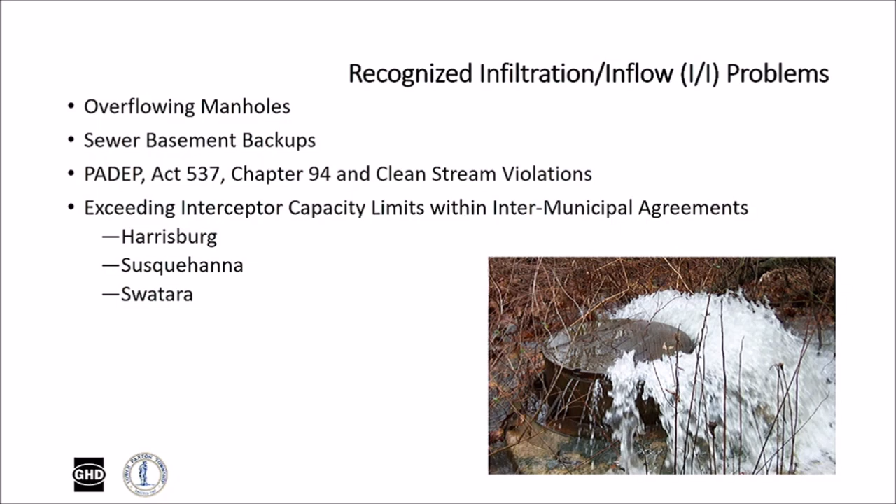A little bit about why we're here: we have overflowing manholes and sewer basement backups that have been eliminated. This all started back in 1993, which required us to address a violation of our Clean Streams Law under Chapter 94. We also exceeded interceptor capacities under our local intermunicipal agreements, including with Harrisburg, Susquehanna, and Swatara. All this led to a consent decree with DEP.

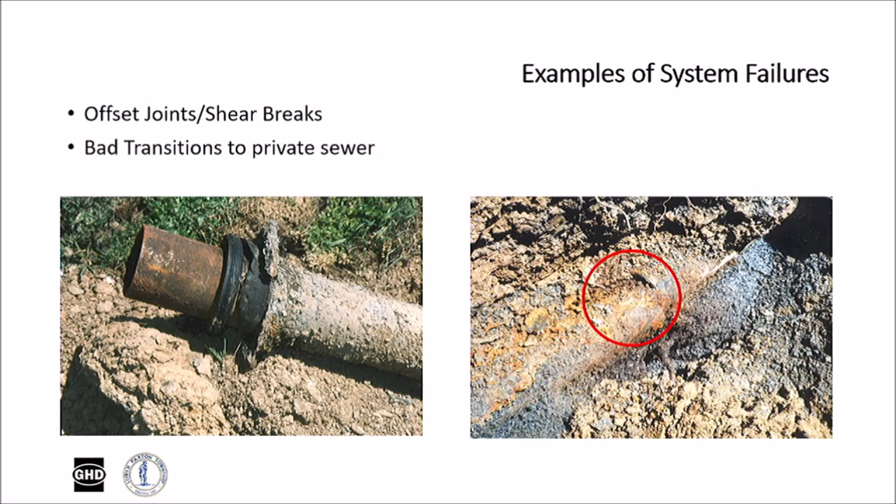Again, a little bit about why we're here. You can see from these photos what happens with a 50-plus-year-old sewer system. There are failures in the pipe when it's not backfilled properly, and to the left you can see where the joints were not well established when constructed—bad transitions and missing pieces. Here's another example of poor backfilling procedures from back in the 70s, with missing pieces of pipe.

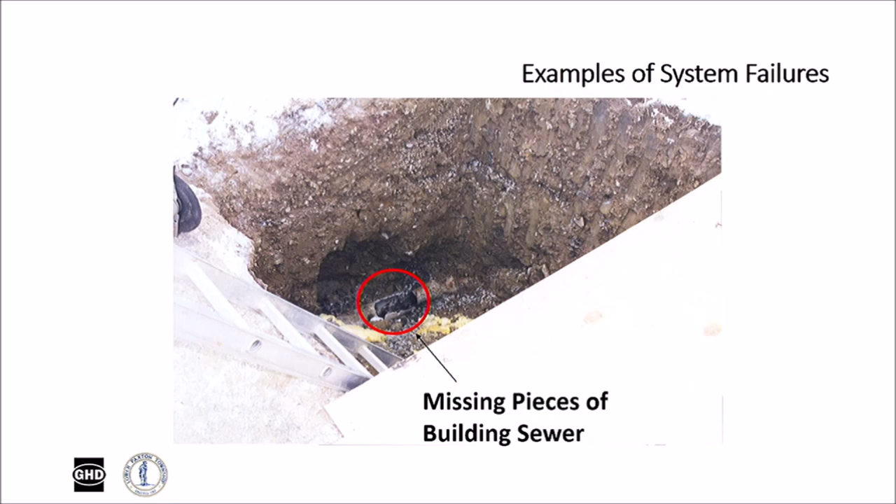All this led to the Second Amendment to the Second Consent Decree. Our engineer recommended that the 50-year-old sewers, made of asbestos cement and clay, have reached their useful life and need to be replaced.

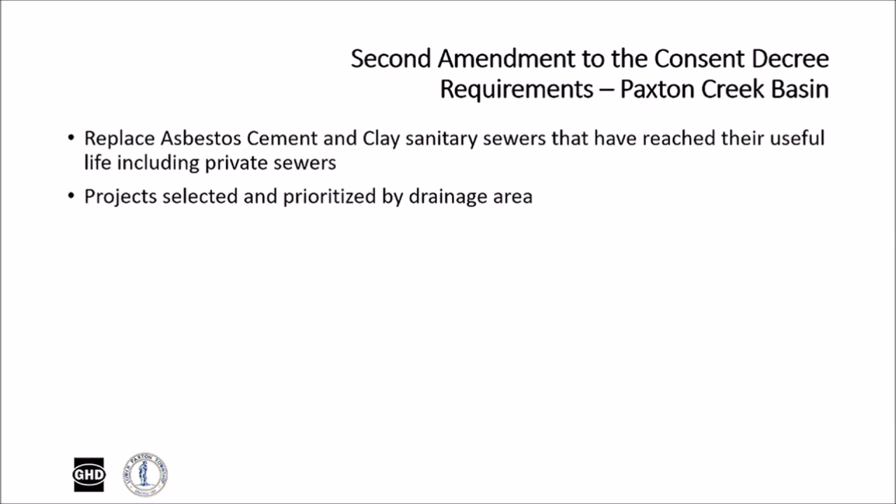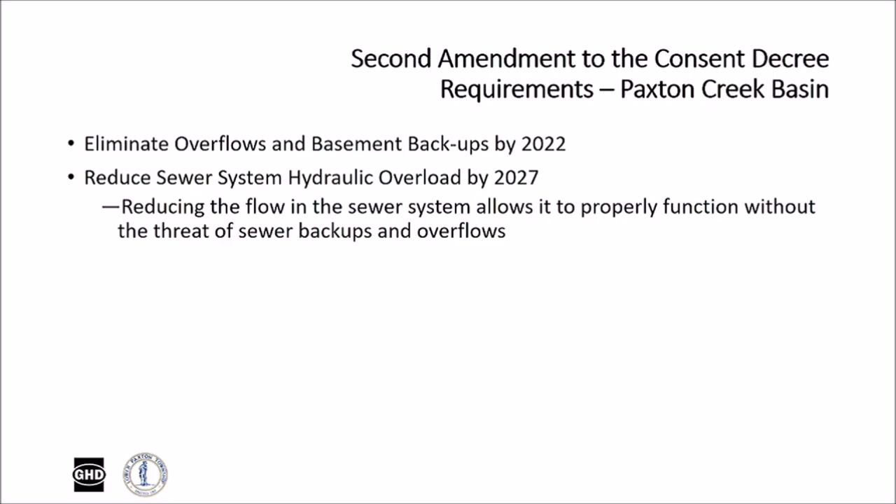The projects are selected and prioritized by drainage basin and by sewer flow metering. The goal is to eliminate all overflows and basement backups by 2022. We are down to one overflow, having eliminated over 100 basement backups and overflows with these projects over the last 30 years. By 2027, we aim to reduce flow in the whole system so it functions properly without the threat of a sewer backup or overflow.

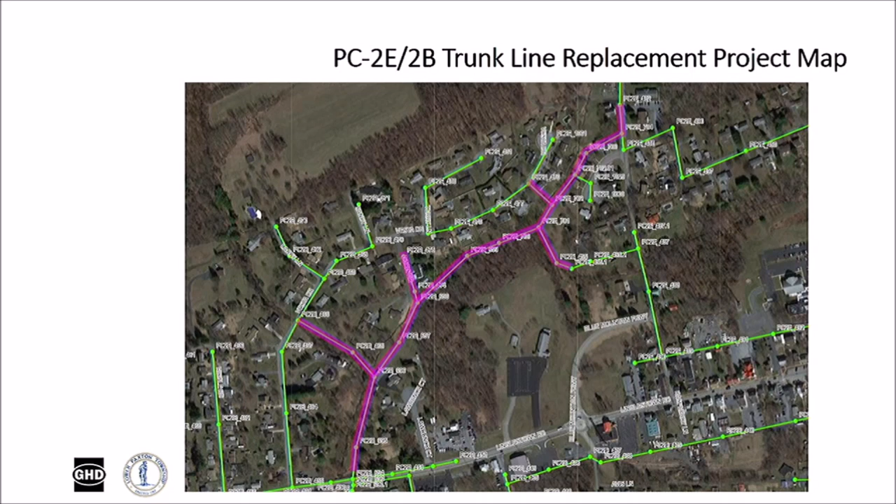This is a map of the project area. You all live here and are familiar with it. The pink line starts on Linglestown Road and travels north, with offshoots up into the side streets. This project is anticipated to eliminate an overflow that was reported by residents in your area. We'll go through it piece by piece on the sewer system up there.

The project will consist of replacing old pipe—3,800 feet of asbestos cement sewer. There are 20 laterals that will be replaced; we're not going all the way to the house, but will replace that portion of the private sewer within the sewer easement. There are also portions of the stormwater conveyance system that will be replaced, now that the Authority owns stormwater, along with other miscellaneous work needed as part of this project.

The first part is right-of-way clearing and so forth. The estimate is $2 million, and that will be updated next month when we complete the design. The design is about 90% complete right now.

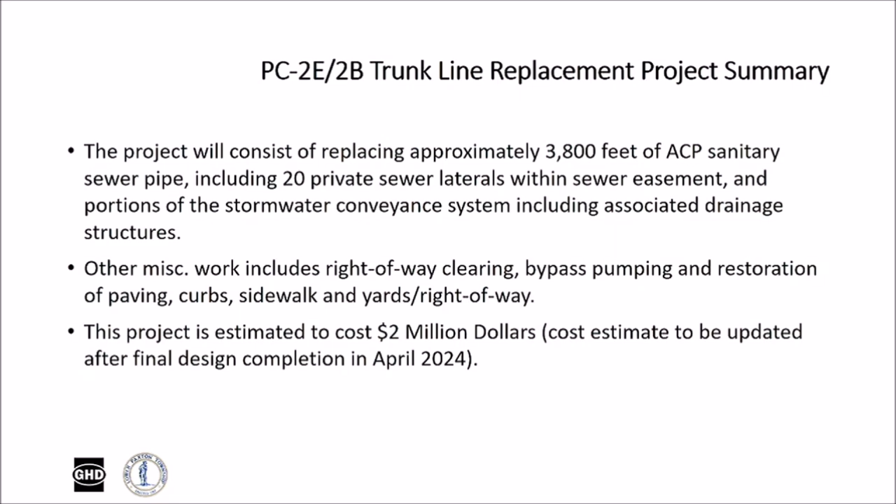A little bit about the design: again, this starts on Linglestown Road. The engineer is required to stay away from the stream and move the sewer away from it where possible, also to minimize stream crossings.

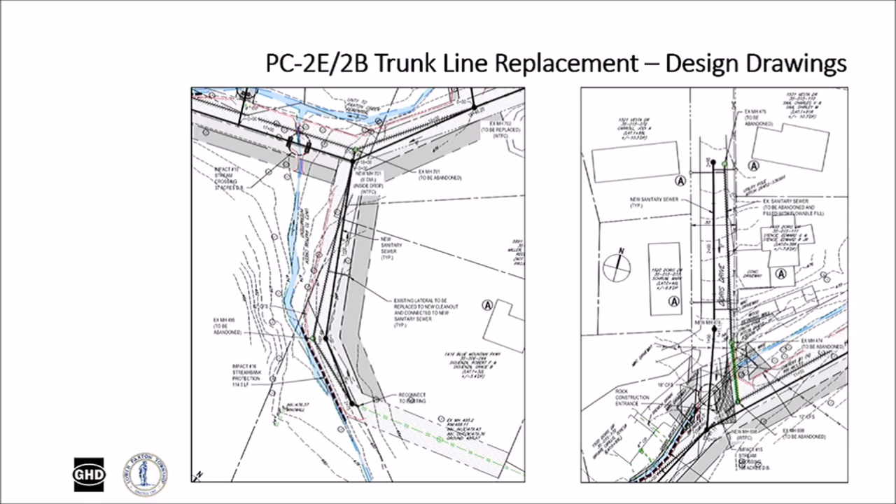A little bit more about the design. As I mentioned, the DEP criteria for sewer and storm replacements requires engineers to minimize impacts to streams and wetlands. The authority will be required to acquire new easements from owners who already have an existing easement, but in order to relocate the sewer to minimize these impacts, there's just a small portion of new easement needed along with the existing.

All the off-street sewers are owned by the authority for sewer, but for storm sewer, those are still considered private.

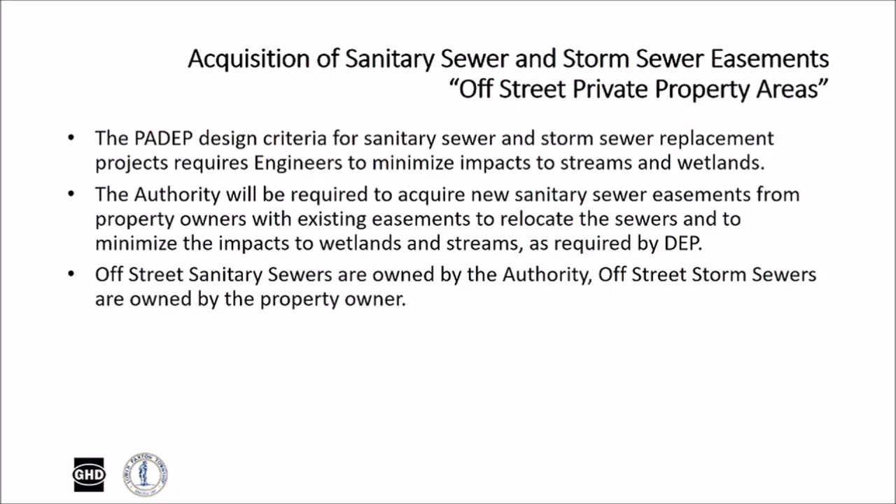Upon request, staff and the engineer will meet with each owner to discuss the easements and address any concerns or impacts the easement may have on your property. We encourage you to do that, and we'll talk about that more as we go. Following construction, all your easement areas will be restored to their original condition.

We're going to talk a lot about the obstructions. There's quite a few obstructions in this project. A lot of the backyards are small, and there's sheds and fences in the way, and very limited work zones in some areas, along with the creek. In most cases, the sheds can be relocated and the fence is temporarily removed and replaced, so we're going to go over that next.

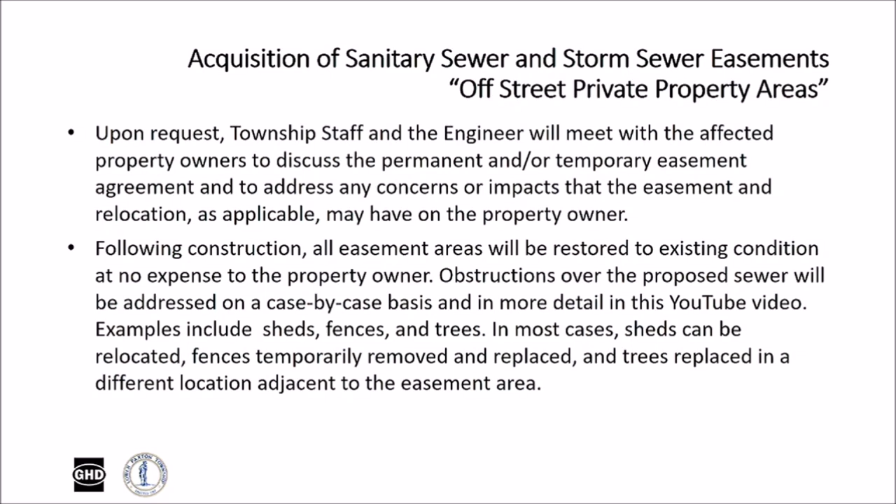So these are just the type of easements. Generally speaking, there's 22. They're all sewer or stormwater, and these are just different variations. You have some that are permanent sewer, temporary sewer, some with sewer and storm sewer. It'll be detailed in your letter which type you've received, and we're going to show some examples of that.

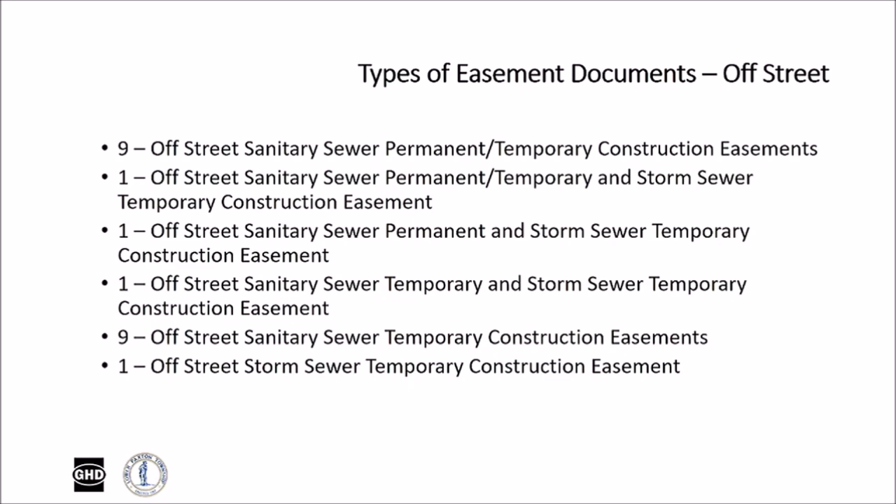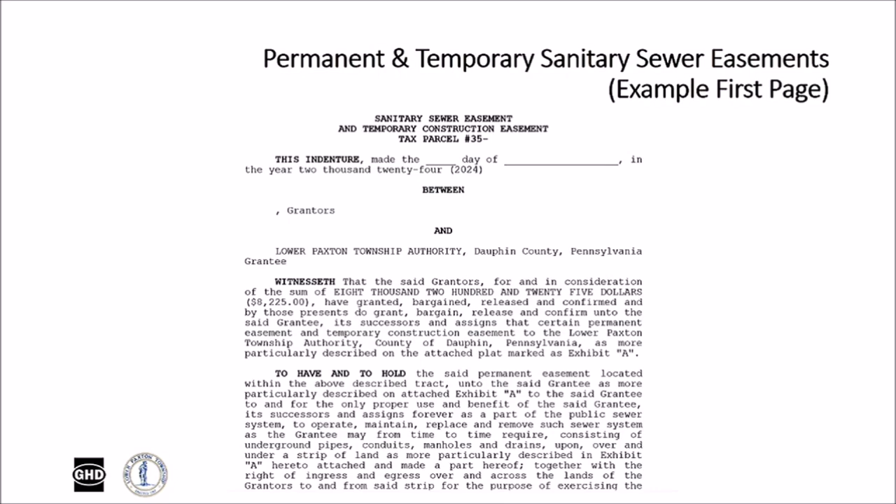This is just a standard easement agreement document that all solicitors use for municipalities and authorities. This is just the first page, but basically all it does is show that you're granting the authority a sewer easement. For the permanent ones, it has to be recorded at the courthouse. For temporary, it extinguishes after the project is over.

This is an example of a permanent easement. You can see the sewer being relocated, and then there's that small area along the creek where we need existing plus new sewer easement. The temporary easement allows sufficient area for the contractor to store materials and do the construction.

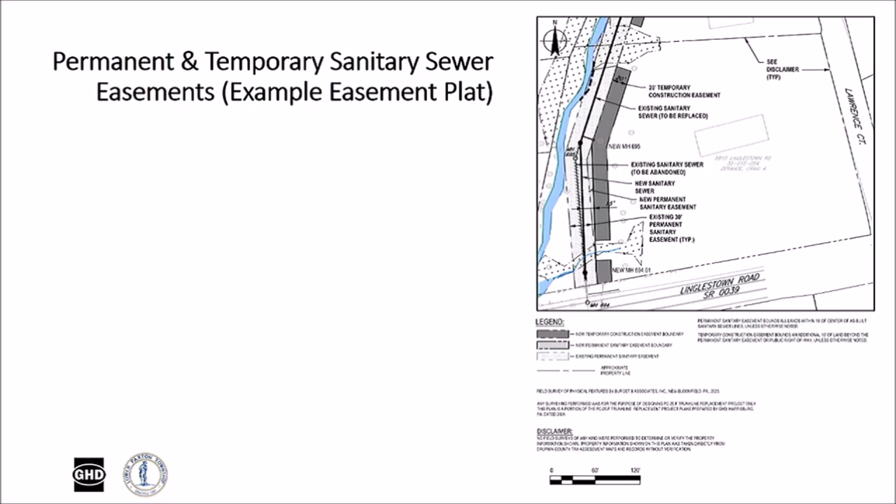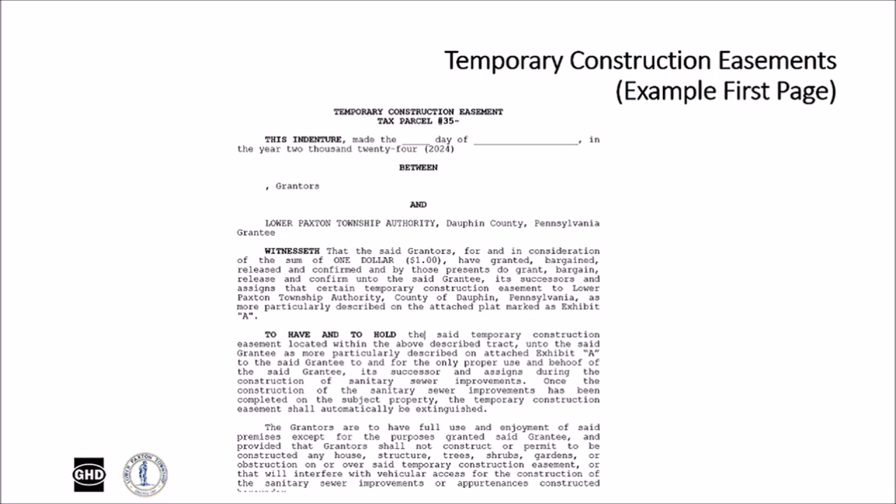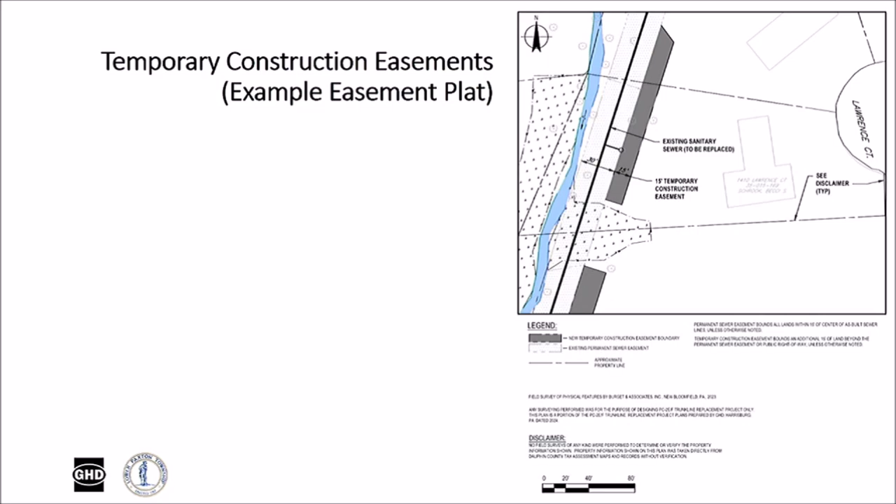A little bit about the schedule. First, we want to finish the design—that'll be done at the end of April. We want to acquire all the easements by the end of May, award the project in June, and then have a pre-construction meeting in June. Construction cannot start until August.

We actually have a restriction along the tree line—there's long-eared bats, so DEP does not allow construction to occur over the summer months because of the bat issue. So between May and August, we are not allowed to do construction until after August 15th. Including all the yard restoration and so forth, the project pipe will be done in the winter, but the project won't be fully complete until May of next year.

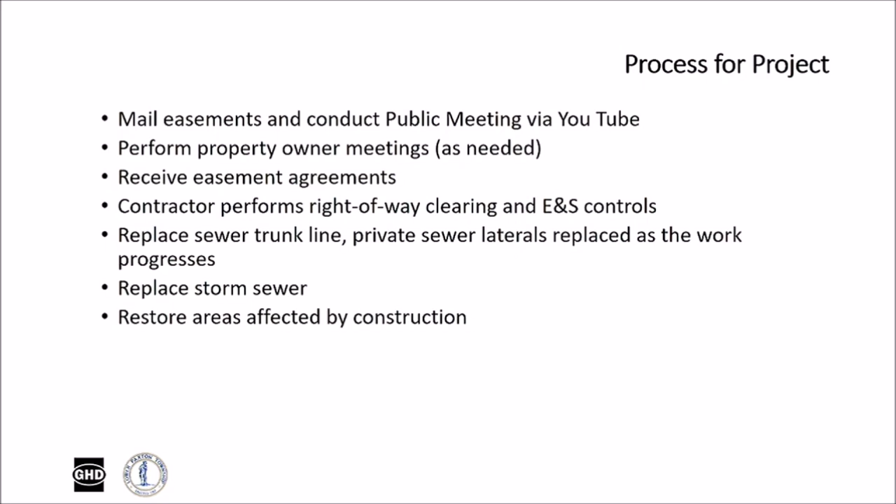So we'll just go step by step through the process here. We mail the sewer easements and stormwater easements. We have this YouTube public meeting, and we have meetings with each of you who request them. Some of you may not, because it's pretty simple and straightforward with no impacts, but we do encourage having the meeting. We receive all the easements, the contractor starts the work, we replace all the sewers and storm sewer, and then we restore all the areas. We'll go into detail now on each of these steps.

A little bit about your sewer line that's going to be replaced—just some nomenclature here. The building sewer is the area that normally goes to the sidewalk, and the service lateral is the portion that goes to the main. The lateral is 6 inches and the building sewer is 4. But in Lower Paxton, the entire private sewer is owned by the homeowner, and the authority only owns the main line in the street.

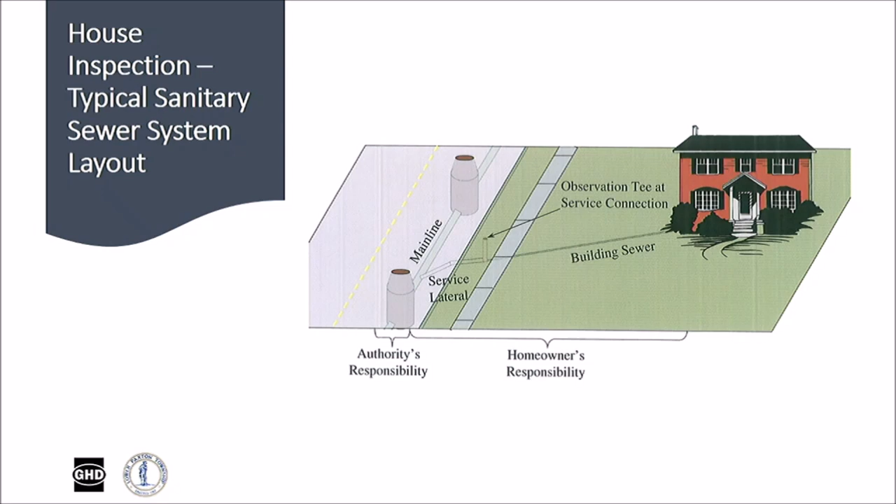This is typical in Pennsylvania. Some townships do own the lateral, but very few. This sewer line that we're replacing is a little unusual because it's not in the road, it's going behind your house. So this diagram does not show it behind the house, but we do own the main line sewers off the road as well.

So for the private sewer that goes to your house, we're going to be replacing the lateral portion in the easement area. This is just the spec provided to the contractor, showing that you have to put in this special double sweeping tee, and this provides two functions that I'm going to go over next.

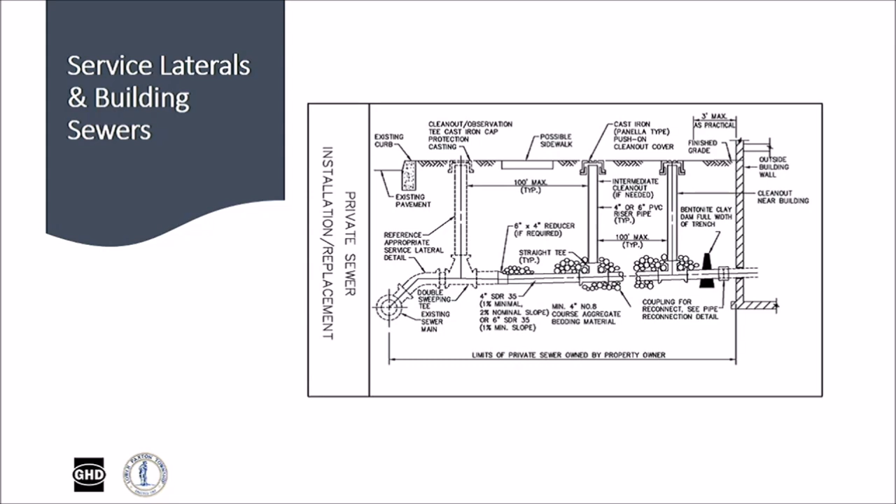So there's a blow up of this double sweep tee. Basically what it does is allows the transition from a 6-inch lateral to a 4-inch building sewer, so you can have two pipe sizes in this tee. Then it also allows for future cleaning and televising, so it allows a piece of camera equipment to go around that bend, and also cleaning equipment.

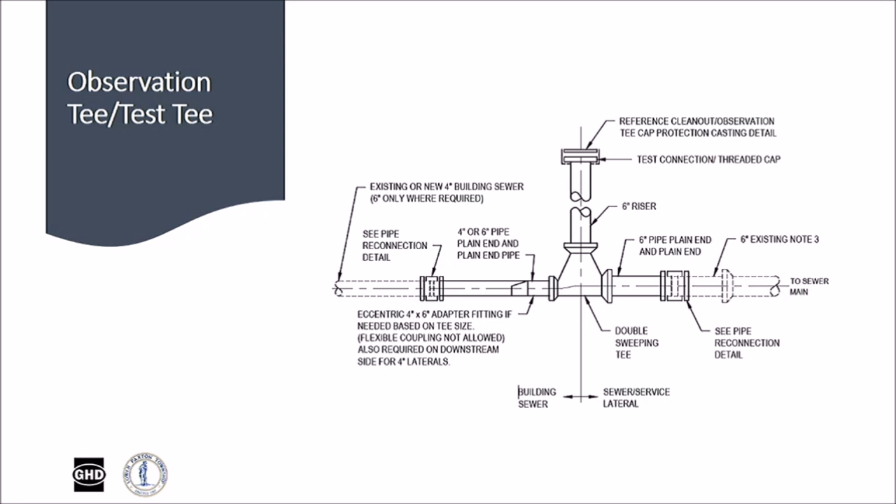So this will be the end of what we replace. You'll have this 6-inch lateral with this 6-inch tee, and we'll have this casting pipe. That'll be the end of the project on your property.

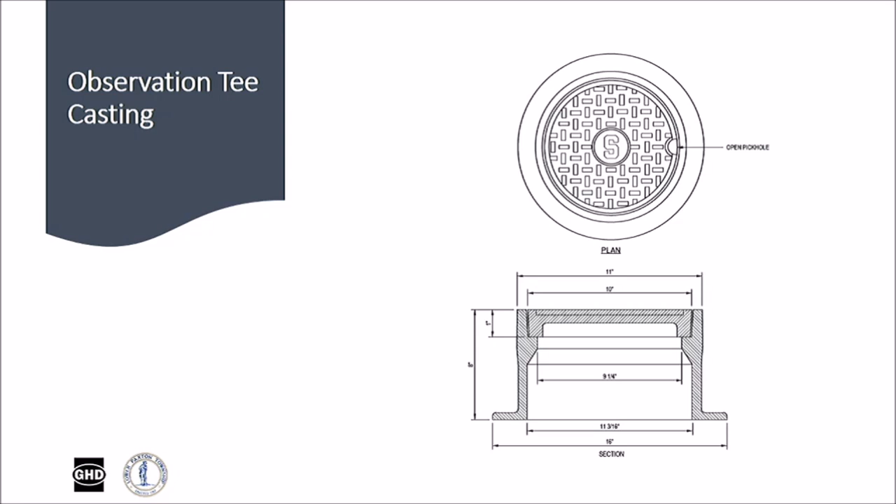This tee casting is better than the plastic. We used to use plastic, and they'd get cut when homeowners were mowing their grass. So this heavy duty casting is typically in driveways, but we started using it in yards so you can find it easier and not damage it.

So while we're replacing your private lateral, you can still use your toilets and your sinks while it's being replaced. However, we ask that you don't use washing machines, dishwashers, or showers, because that's high flow and the contractor's going to be in the ditch working. So we do recommend that you don't do that.

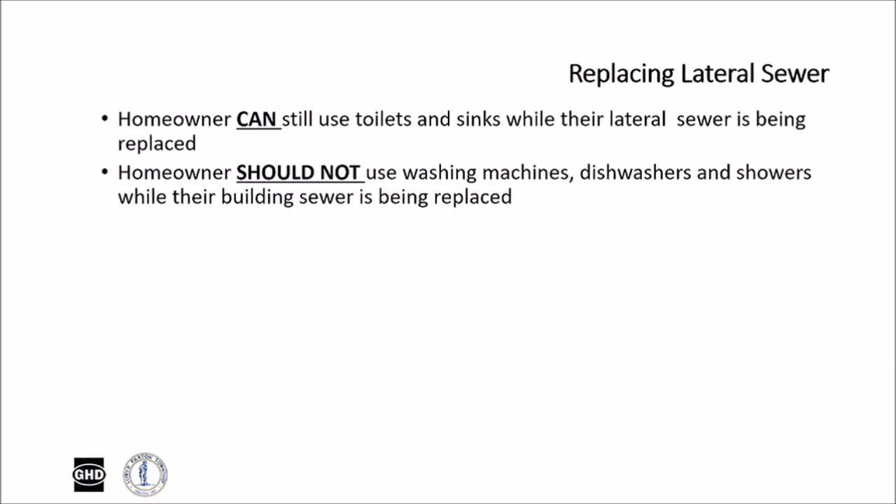You will receive a door hanger telling you when we're starting your property and the estimated date, and you will actually see, as they just move in to your neighborhood, you can tell house by house when your house is going to be done as well.

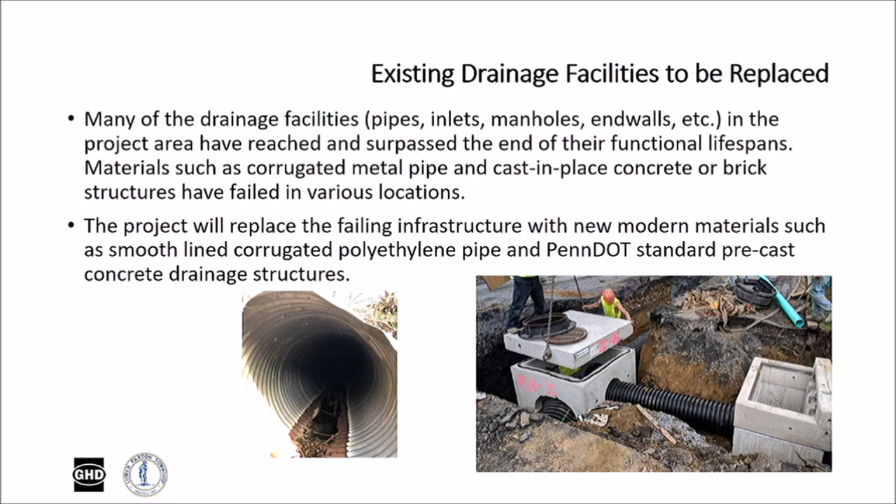Okay, a little bit about the stormwater. So you can see on the left that the pipes are basically rotted out. All the storm pipes were corrugated metal back in the day, and with acid rain, basically the pH of the rainwater is so low it does rot out the corrugated pipe. So in this area, there's very few stormwater drainage facilities along the sewer easement, but we'll be updating those with modern polyethylene pipe and PennDOT approved concrete structures.

So this is probably the most important part for the residents. What can you expect during the project construction-wise? The first thing you'll see is on those off streets, the contractor will be laying down his pipe and his manholes and his big trench box there with the safety horses. We just advise residents to be aware that we'll be storing some materials that are needed for the job.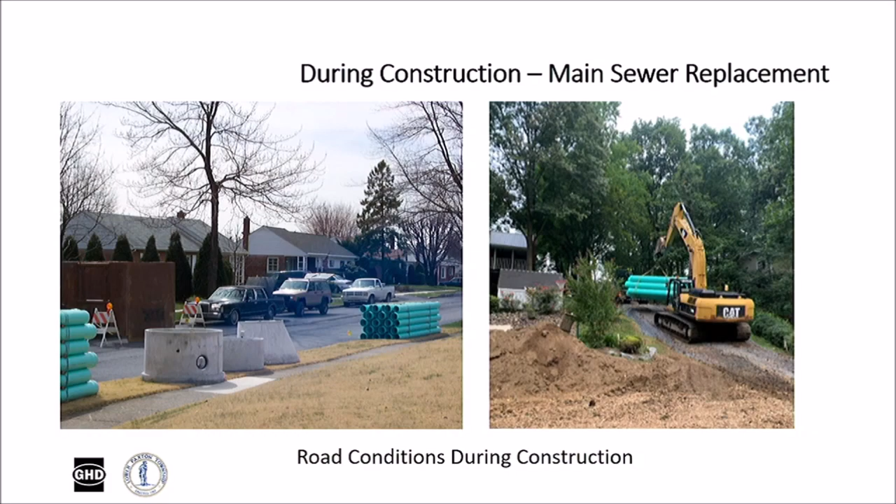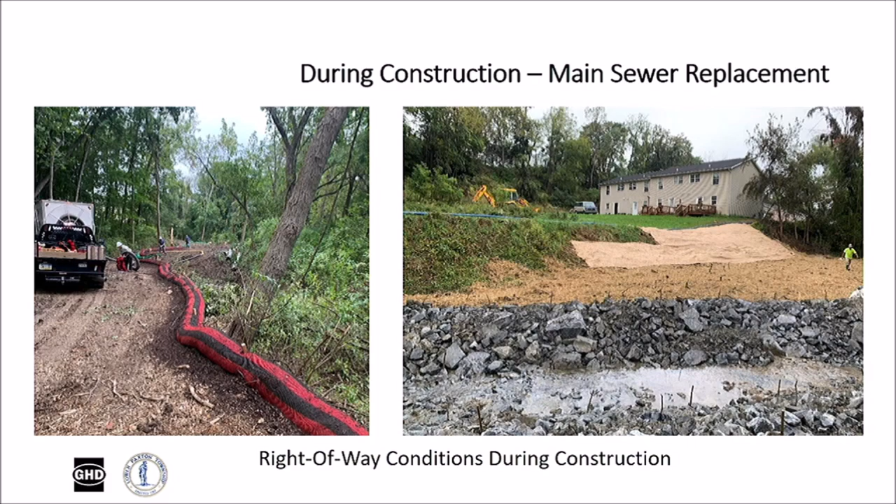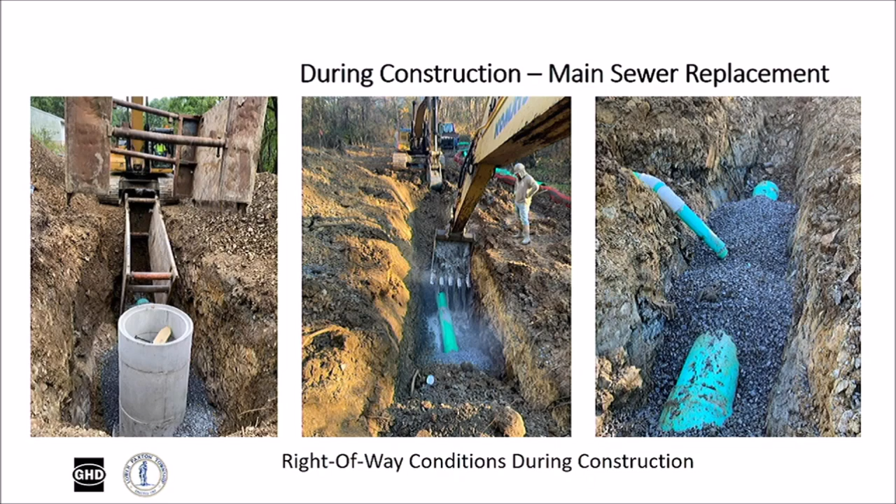So this is a project that we just did a few years ago. We have a lot of photos to show. This is what to expect. This is a project just like yours where the sewer ran behind the houses in Spring Creek down by the hospital. This is active construction. You can see to the far left they're putting in the manhole. They have their trench box. Now they lay the pipe, and then on the far right you can see where your private lateral ties into the main, and that's the progression there.

So a little bit about obstructions. We didn't see this when we walked it, we walked the whole project. We didn't see many people with bushes or flowers or gardens, but if you do have some, you have to take those out because the contractor will remove them and won't put them back.

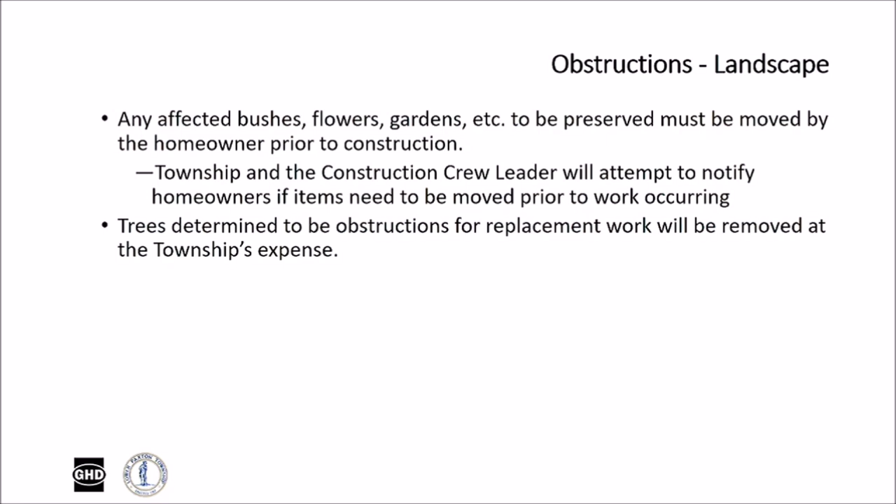The crew leader will attempt to notify homeowners if they see this prior to the work. Any trees that are in the way will be removed at our expense, and that'll be the first thing you'll see. The contractor will set up an E&S plan, which is erosion and sedimentation control, so no soils get into the creek, and then they'll take down the trees in the sewer easement that they can't work around.

As I mentioned before, there are a few properties that have fences, so we'll have to coordinate with those folks that may have pets. We will put up temporary fencing at the end of the day if there are pets involved or pools, but they'll basically take down the fence and put it back up when they're done, as they're coming across the property with the sewer line.

There are 5 properties that have sheds, and those owners have received a special letter. We strongly encourage those folks to meet with us because they need to remove everything from the shed. The contractor's going to rip out the shed, and then we'll put a new shed outside the easement area for those property owners.

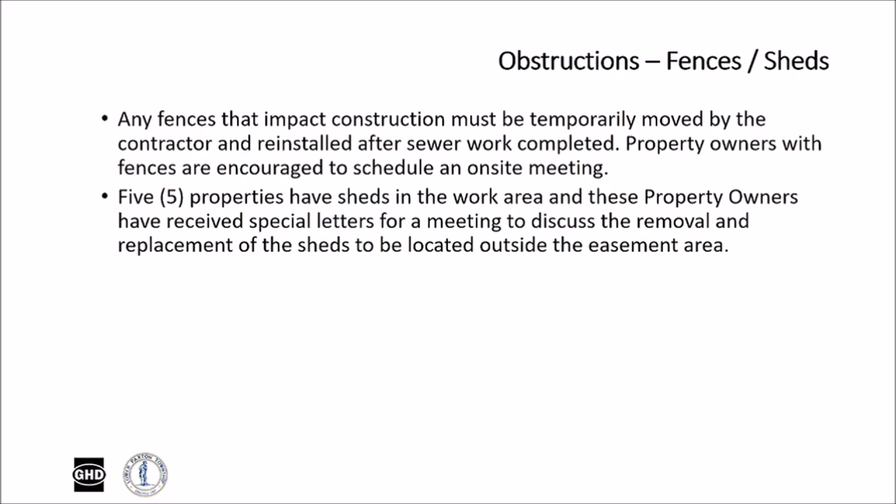Okay, after the job's done, you can see we have some details on what to expect with the seeding. This is a flyer that we provide that just says congratulations on your new sewer, and then it talks about what to expect for watering and to give it time before you start mowing. So this is just a general flyer.

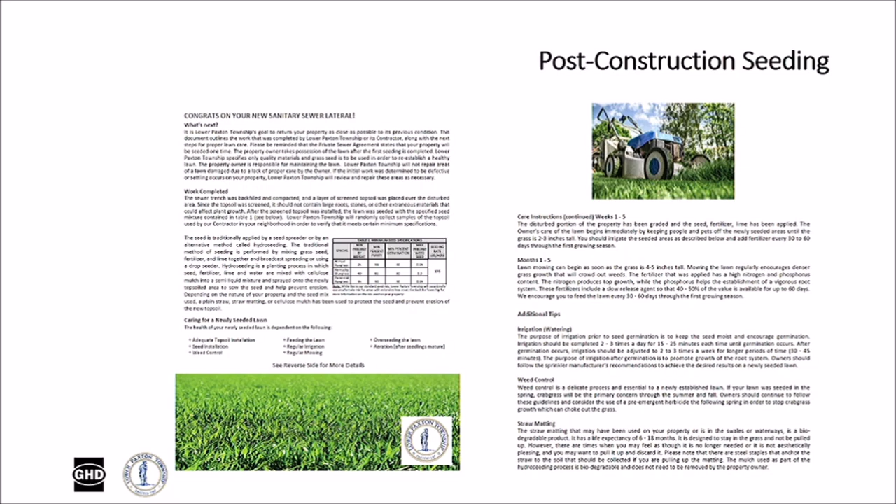Then we provide the seed mixture, using the top seed mixtures with fertilizer and so forth. This is something we started a few years back. We noticed that a lot of people along sewer right-of-ways actually extend their yard back that far, so those have been identified by our engineer. We call those improved right-of-ways versus unimproved. There are different standards on what the contractor does for seeding. If it's being mowed, there are stricter requirements for using screened topsoil, better fertilizer and lawn mixtures, compared to the unimproved right-of-way, where it's just along the creek and there's woods and it's not mowed.

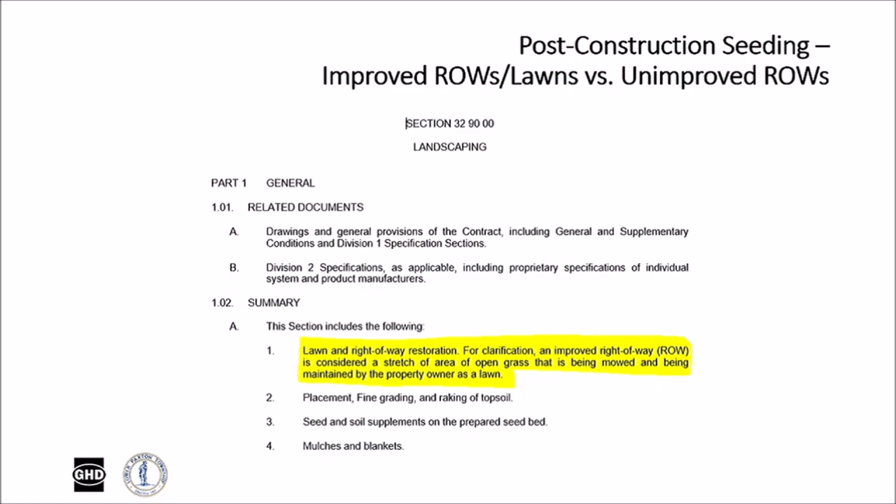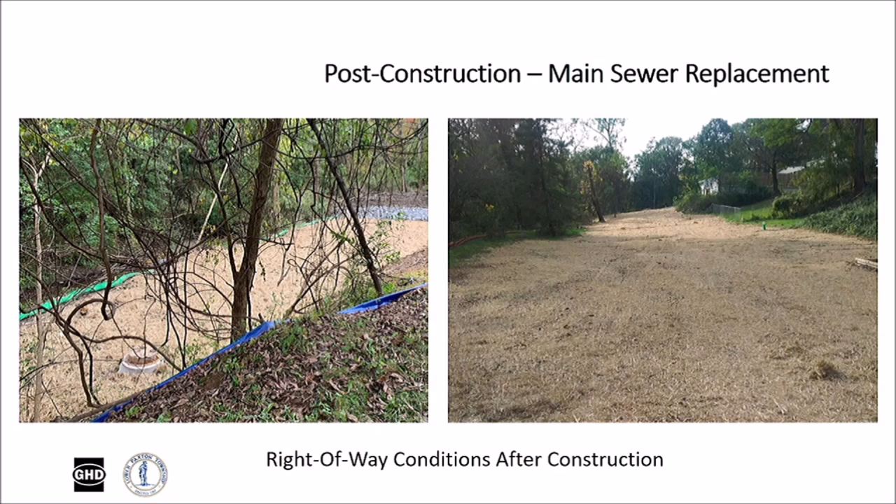And this is just an example of what it looks like when we're finished. The whole right of way has been seeded, and you can see they have their straw blanket down.

So moving forward then, we just have a few slides remaining here just to explain what we expect from the property owners. We ask again that you schedule a meeting so we can go over any concerns that you may have. You can just call me at my office.

Dog fences are popular now, the invisible dog fences. Water lines for sprinkler systems, and electric for landscape lighting is real prevalent. We don't expect to see a lot of that in the back because it is in the back. We normally see some of those things in the front, other than the pools, of course.

If you don't have access to a computer, we do mail along with the letter. You'll see you have a return envelope that already has postage on it with our address.

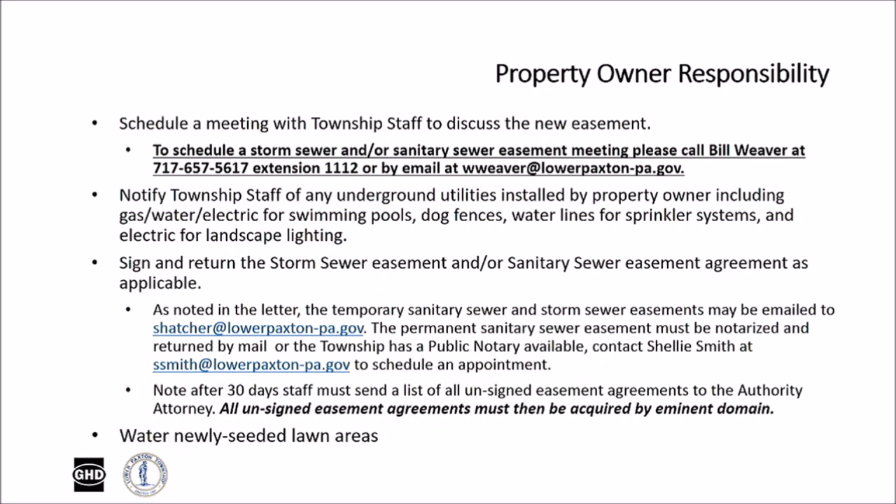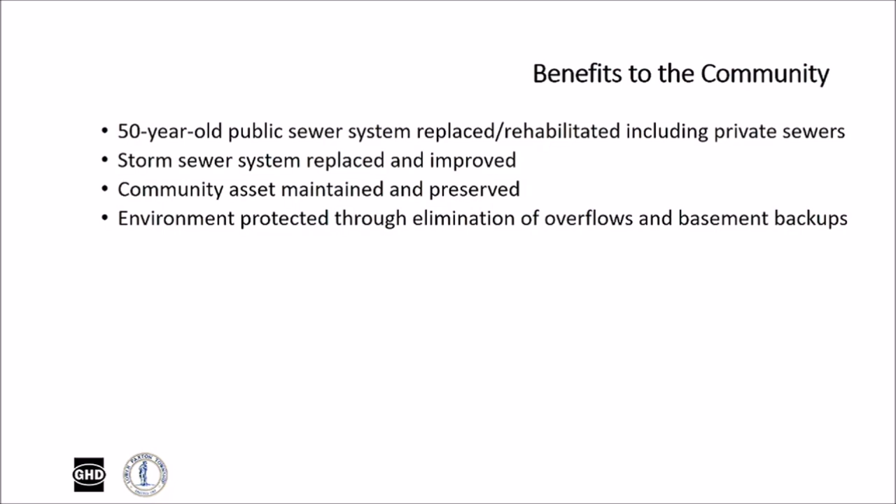So, benefits to the community: your 50-year-old sewer system is replaced, including partial private sewer, and then portions of the storm sewer system are replaced and improved. This asset of the community is maintained and preserved, and of course, the environment is protected through the elimination of these overflows and basement backups.

We do have a notification system. The township utilizes CivicReady, so if you have a desire to get emails or texts or phone calls as part of this process, we will get your cell phone number or email address and provide updates as the project progresses.

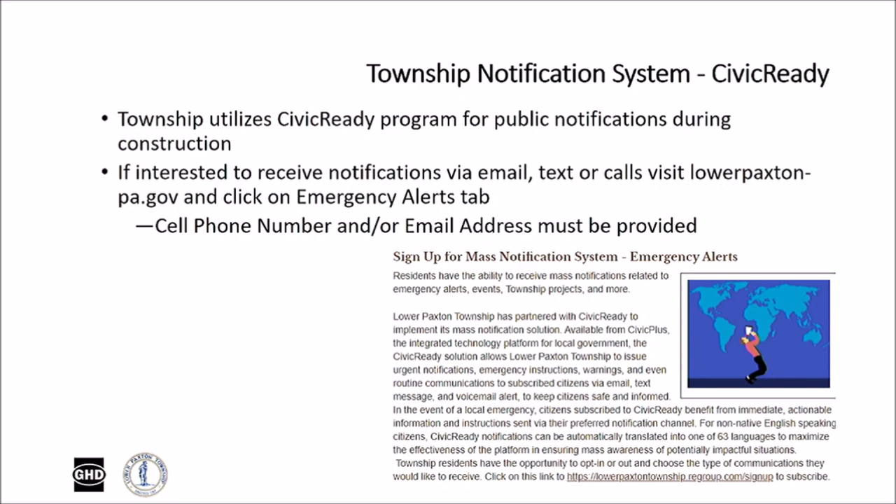You can also stay up to date by visiting our webpage, which is where this YouTube video that you found is located, the same tab, Sanitary Sewer Stormwater tab. And we encourage you to ask questions about the project at any time. This email is checked every day by staff.